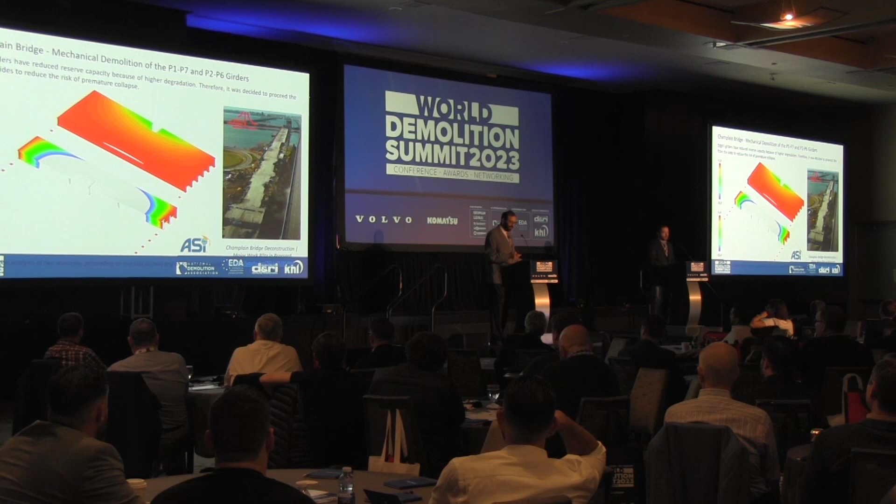And the number of girders to be left till the end was one of the parameters we studied, to see the optimum number of girders that can safely be in place before the drop is initiated. So this is, of course, the amazing work done in doing all of that at the same time, and the analysis done in the background to make sure this sequence would proceed safely without unexpected failure of the bridge ahead of the intended drop time.

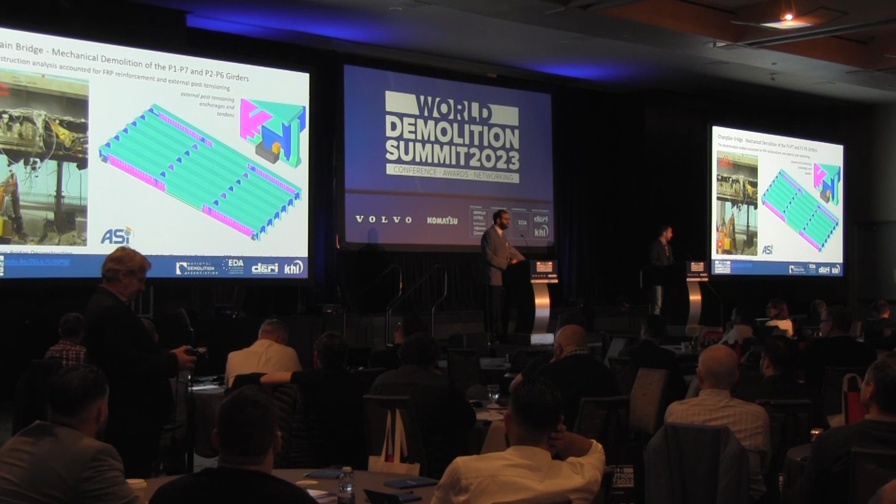So we're looking at the stresses and deformations in the bridge beams based on the specific sequence they were proceeding with. We accounted for, as I mentioned, the additional reinforcement, things added to the bridge after the fact. The red color here is the additional reinforcement, and its effect was taken into consideration when measuring how much the bridge is going to deflect as we, piece by piece, start removing parts of that bridge.

This is the simulation done for a case where we try to see how far we can push it. Can we go until we just have one girder standing, or do we need to drop it ahead of that? And it was decided we're not going to go with the one-girder scenario for this specific case. We estimated its factor of safety and decided to go with a different scenario with more than one beam at the end.

Here, this is taking it to the extreme, trying to go with mechanical demolition till the end, and we're looking at how much it deforms. The chart shows how much the structure deforms with time as we start taking parts off of it, and this is how it would collapse if we go with that sequence.

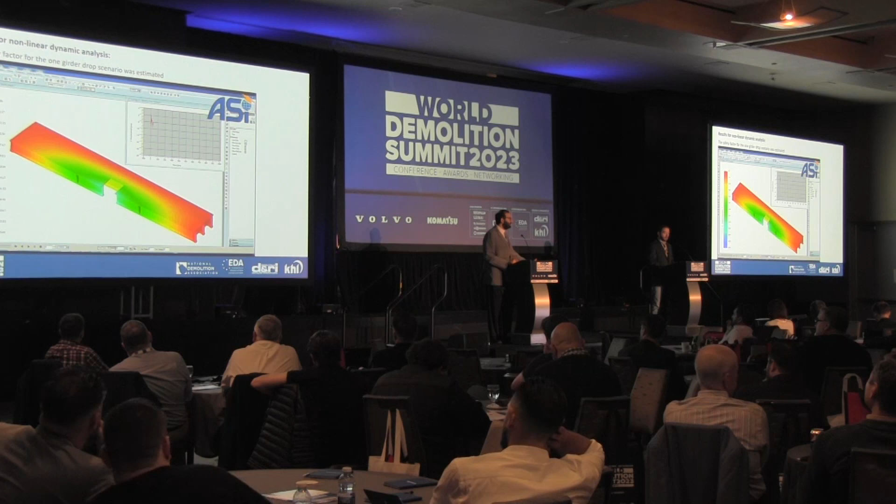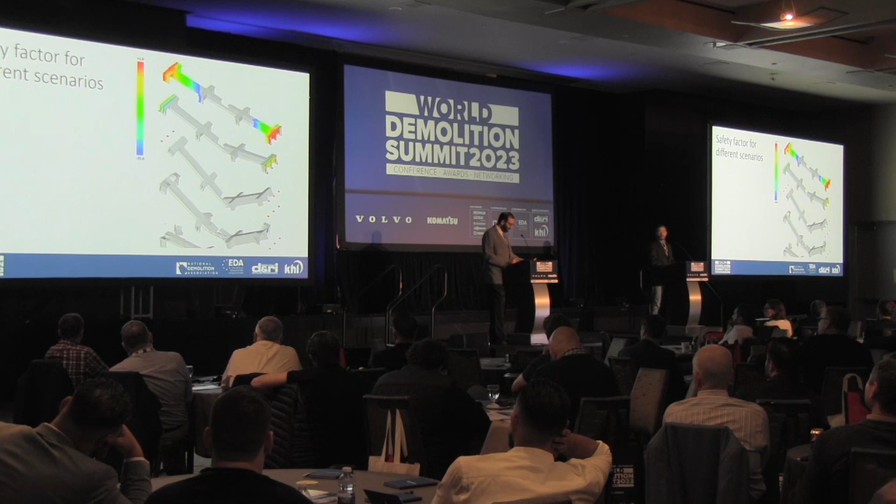And we studied many of those sequences, dozens at least, to come to the optimum one. For every scenario we study, we look at the safety factor until we get a scenario that is feasible and at the same time satisfies the safety factor that is acceptable for us and for Delsan.

So that's the final agreed upon sequence of demolition for one of the spans, actually a couple of the spans, and as I said, every span was different, so every span that we studied had to have a different model for it. And this is how it was actually implemented.

You can see that we also included the boundary conditions. So it's not just the span of the bridge, it's also how much of the bridge is still continuous at the top and at the bottom of this picture. The rest of the bridge was also taken into consideration in the model, the effect of the remaining parts of the bridge on stabilizing the piers, because we also wanted to make sure that the piers are stable during the drop. So that was also one of the factors that we had to look into and coordinate closely with Delsan.

We had the information about the bridge piers, and we included them with their actual dimensions, actual reinforcement in the model. So it's one big model taking all those engineering factors into consideration. Some of the spans had different number of diaphragms, like this specific one, this was the number of diaphragms that were included, and this is how it looked just before the intended drop or the induced collapse for the remaining portion. This is the kind of stress analysis that we do to make sure that it is safe until this point.

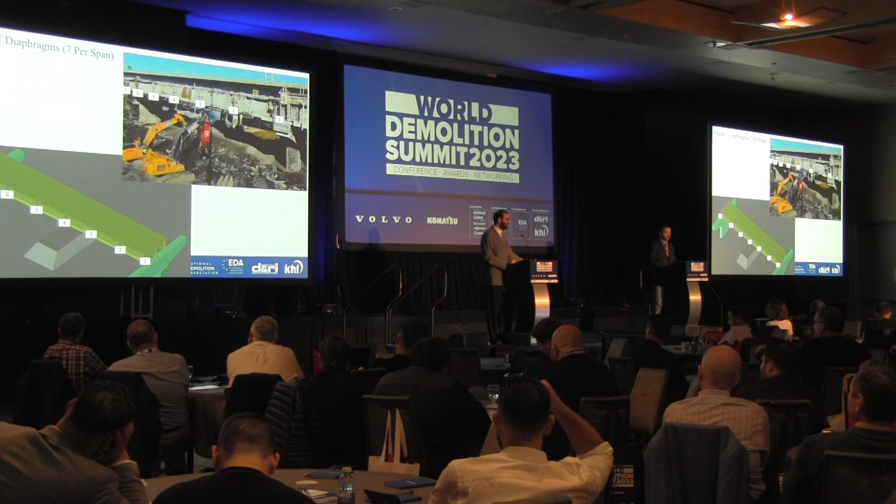And then we looked into, now it's showing the additional point, which is kind of controlling the drop when it comes time for the drop, making sure that the impact with the ground is controlled, that it's not causing excessive vibrations, that it's not causing excessive damage to the piers. So that was a very important point for Delsan, and they provided all the information, and they proposed multiple scenarios for where to place the debris pile to control the drop of the bridge and where they're going to make the cut. And for every span, it can be a different scenario.

So we looked at multiple scenarios, and we're trying to avoid a scenario like this one. Maybe another click will do the trick. So that was a concern that Delsan had and that we had. We didn't want to see something like that happen. So we wanted to make sure that the drop of the bridge is controlled and the span is dropped, but the piers are not affected.

So we did an additional analysis looking at the force on the pier. So from the engineering analysis, we do the cutting in the bridge, and we see how it's going to drop and what's the height of the debris pile and what's the location of the debris pile. And based on that, the chart is showing the force that is hitting the pier. For this scenario, the bridge does not collapse, and the force that's hitting the pier is acceptable for the design of this pier. And we repeated that for the different piers.

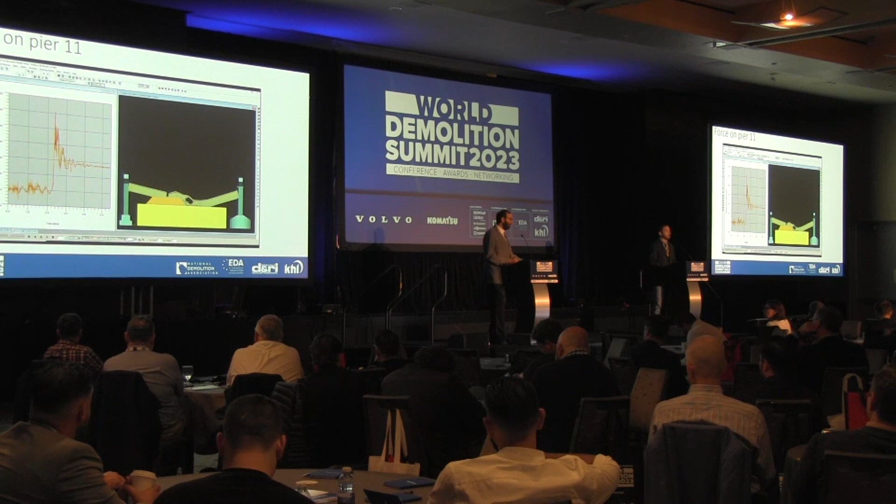So for this pier, it's a different impact force, it's a different height of the bridge dropping, and it's a different design for the pier itself. The amount of reinforcement of the pier is taken into consideration, and how much force can this pier take as a lateral hit when the bridge falls and impacts the pier. So we looked at all of that, and we checked with Delsan, and we got multiple scenarios, and for the different spans, we looked at the different scenarios.

So this is like a picture straight out from the report that was used for the final plan. We did multiple runs with different risk scenarios, different locations of the debris pile, and different properties of material for the span of the bridge.

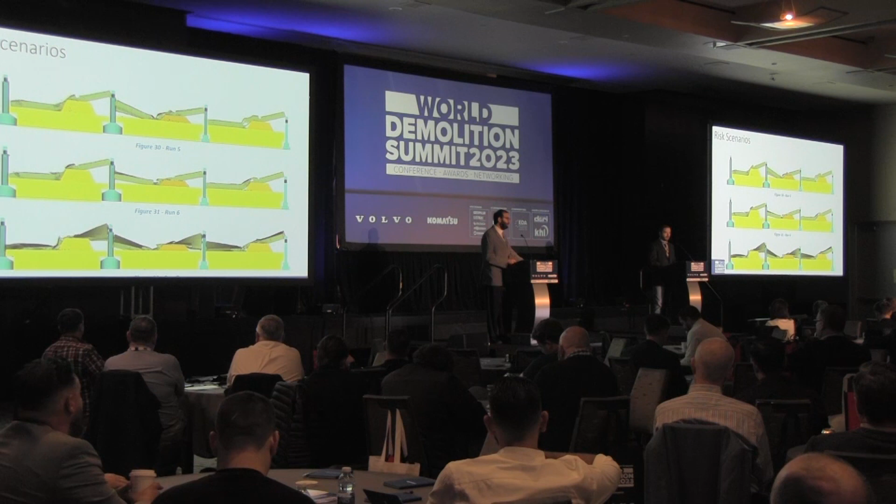And based on that, another point that Delsan raised is the debris spread. We wanted to make sure we don't have the debris spread exceeding a certain limit, so we provided, this is the output from the engineering analysis, this is where the spread is going to land, and this is how far from the footprint of the bridge the debris is going to land. And this is one of the simulations for one of the bridges.

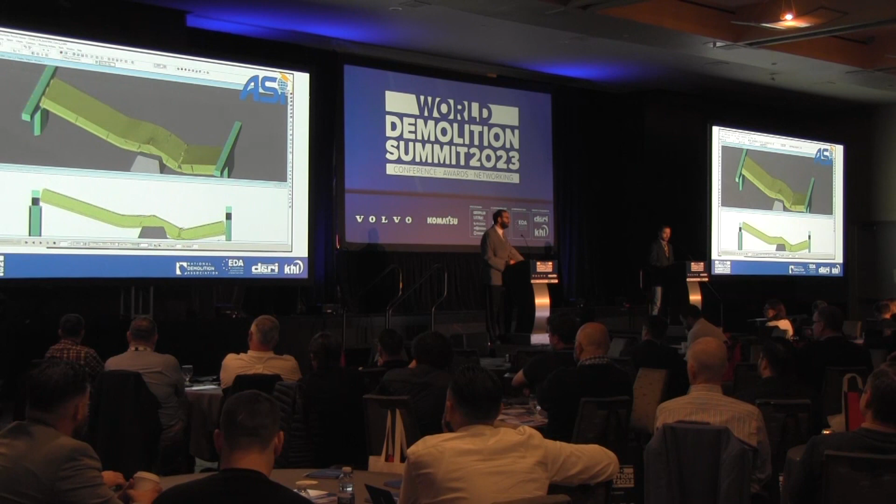This is how it looked in the analysis that we made available to Delsan to do their planning based on this kind of result. And this is how they actually implemented it. Let me see if this will go. Okay.

So the number of beams left, the location of the cut, the debris pile that is placed below, all of that was part of the planning that led to the successful outcome that Delsan is showing here. And this is all for just the one method.

I'll just put some side-by-side shots for this method. This is how it happened, and this is how the model was predicting it. We tried to match the angle to have a similar looking angle.

There was another method. There were actually plenty of other methods that Simon mentioned, but this is the other method that Delsan required us to do the analysis for. So I'll let Simon introduce this method.

So thank you, Ahmed. So keeping in mind what we just saw, the instability of the actual span where we're actually demolishing it, we had another challenge. It was to remove 30 spans over the St. Lawrence River. One of the main concerns that we had was the actual height of the structure. The structure was varying from 15 meters all the way to almost 30 meters up in the air, resting on two single piers with an unstable concrete span.

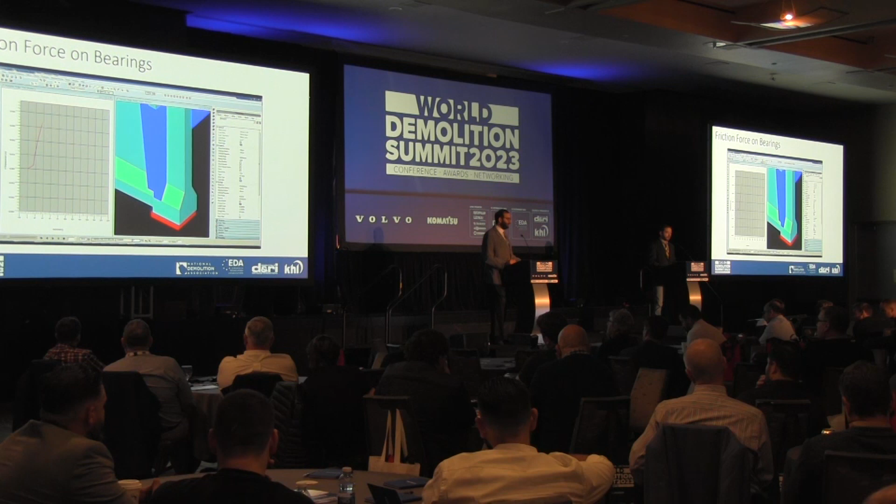So one of the concerns that Delsan raised is the force on the bearings. As they start to lift off the bridge, there was a concern about the amount of friction at the original bearings of the structure. For every beam, we were looking at, as it starts to lift off, how much friction is being generated and whether this is going to be a safe operation or the friction is going to be high and affect the way the bridge lifts off. So that was one of the aspects. Same thing, we focused in our modeling on the aspects that Delsan was most concerned about.

Another point was the stresses in the existing bridge as it starts to lift off. Because the location of the support is being moved, we're taking it off its original support and supporting it at a different point. So it's stressed in a different way. It behaves in a different way now that it's supported on those new jacking supports. So you can see the stress is readjusting inside of the structure, and we're making sure that those new stresses are still safe for the bridge, because now it's sitting on different kinds of support.

So during the lifting process, you can see that stress is shifting from one edge of the structure. The compression stress is moving to a different location because we now have new supports. So that's one other aspect that we looked at.

Furthermore, we looked at the internal forces throughout the length of the bridge for the different spans, because the spans had differences. There were different retrofits done for different spans, so the information included in the design drawings and in the rehabilitation drawings throughout the years was taken into consideration to look at what is the force, what is the shearing force, what is the bending moment in every component of the bridge as it starts to be lifted.

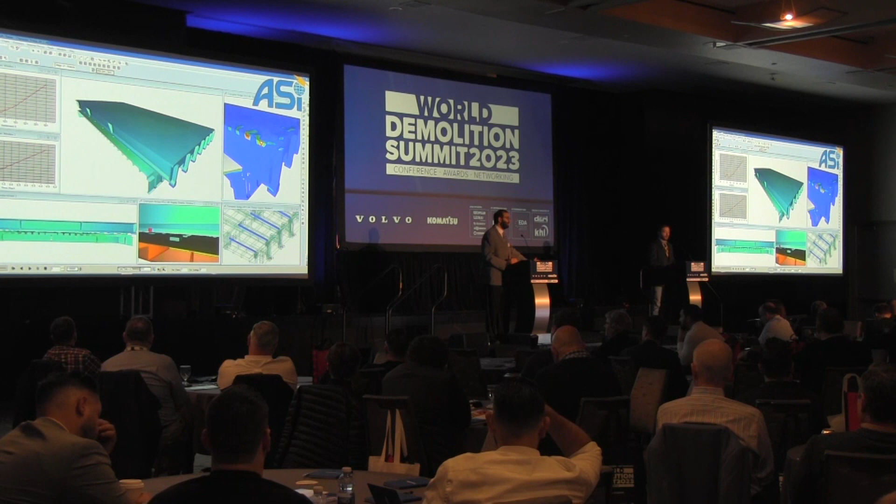So we repeated the same exercise for different spans, because every span is different, and for every one we're getting different numbers, but we're always making sure that the factor of safety is still acceptable, and the performance, the amount of deformation that we're seeing, is satisfactory, and Delsan has no issues with this; this is the kind of motion they are expecting to see during the lift-off process. So that was the summary for every span that we studied. We had to do something like that, and then this is how it actually went. I'll let Simon explain more.

So this is a time lapse that was shortened into a 30-second video. The intent is first to show the behavior of the platform compared to the model that was done by ASI, but also to show you the work and all the thinking that was performed for us to be able to achieve this method. So we'll have a closer look right here. So that's the platform going up. It's repeating one more time. So this is exactly what we were talking about. We're going up, then we're proceeding with the load transfer by deballasting, and then the last push was done hydraulically. Then the barge will be moving upstream. We don't have this shot, and then going down, and then the actual spans were demolished right in place.

So that will be the conclusion of our presentation. Again, we want to thank ASI for the work they did for us on the project. We're really proud of what we achieved on that project so far. It will be concluded at the end of the year, as I mentioned before. For us, the key to our success was first to develop strong communication with all the stakeholders, because there were a lot of people involved, including the federal government, provincial government, the Seaway Corporation, many cities and boroughs, and also the owner of the bridge, which was JCCBI. Everything passed through project planning built around safety, effective risk and change management. In a 3-year project, there's a lot of change, a lot of unknowns, so we have to be prepared to face those changes and risks.